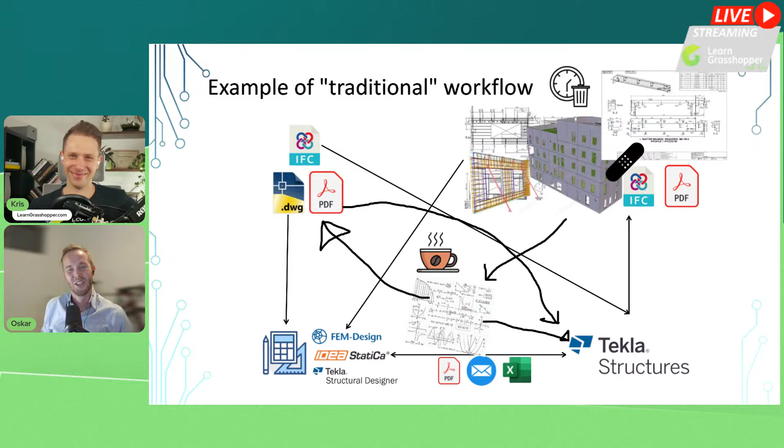This workflow might work if you don't get any revisions, but as soon as you get a revision, it all falls to pieces. You don't know which file to use - is it the one called old, new, latest 5, or is it the other one? So that's the problem with all of this.

So in an ideal world, we have a digital workflow where files are being interpreted by programs instead and fed through. So if the architect updates their DWG file, we can just press a button, rerun our analysis, feed that back in, and see if it changes anything in our structural model and so on.

So there's a big difference between writing on a piece of napkin and having everything flow seamlessly in a perfect world. I understand it's hard to automate everything, but automate as much as we can, I guess. I'm just trying to paint a picture of what's happening in the real world and what we're trying to achieve.

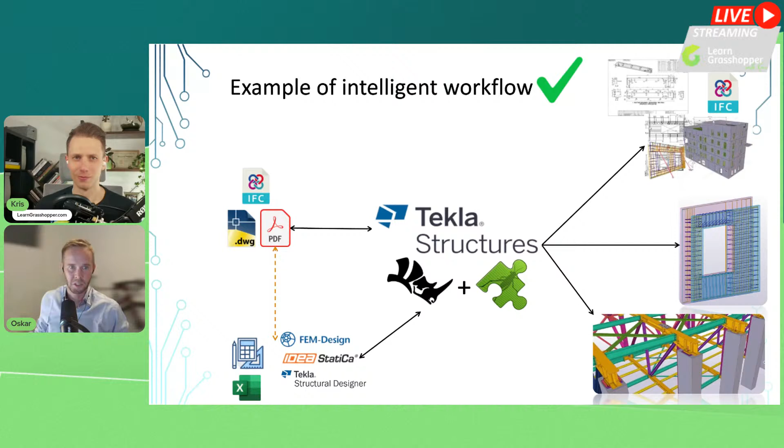Yeah, it totally makes sense to put software in charge of handling all this data instead of humans, especially with all the revisions and all the data entry - repetition, having to sit there and look up a standard table, or look up results from a calculation in a PDF. It's just made for errors.

So I'm just going to move on to the next one. I have a bit of a live demo, we'll see how that goes - we always know how live demos work in live presentations. But I just wanted to highlight a few things. If you're new to Tekla Grasshopper, Sebastian and Trimble keep pushing out a lot of updates - these are fairly new tools in the last 6 months, maybe a bit longer, but they can be great to visualize things in the model for us. So let's see how we can show some of that in a live demonstration.

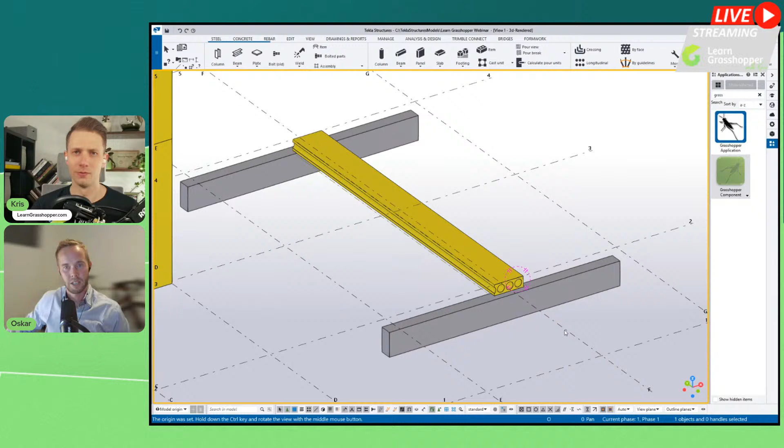I'm just going to load up the hollow core one here, select that, apply, and same as any other component, I'm just going to add that to that component. I get a warning message pop up saying that you have cut this hollow core slab in the wrong zone, you're outside the cutting zones.

So traditionally, you have like 1,000 hollow cores, and you have to check them manually that you have cut everything in the right position. So what can we do to aid that?

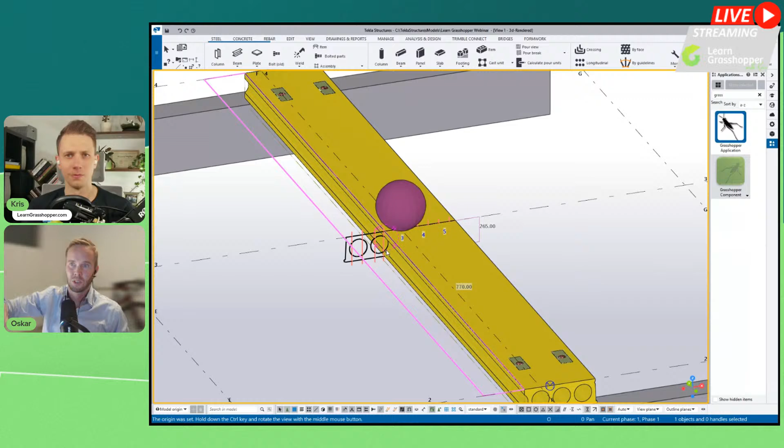So instead of having your standard PDF where you check your cutting zones where you're allowed to cut, we can just take that PDF and embed it into the tool. And if you're outside, it just pops up in your face, so it displays straight away.

So I don't really, as the user, need to know exactly - I can see where these zones are allowed. So I'm just going to take this and move it 50 mil that way, and then I'm just going to hit modify on this one to see what happens.

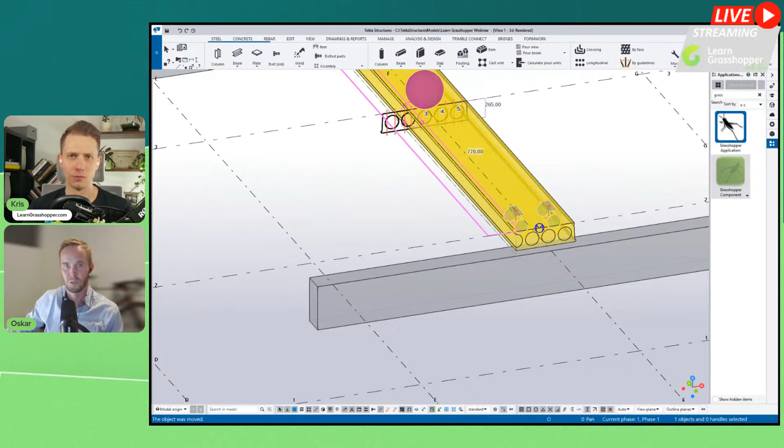So my warning bubble is gone. That was just - I like to place some sort of visual thing on the object in the model to say, okay, something is wrong, you should look at this.

I'm really happy that you started with this example, because like all users, when they're thinking about Grasshopper and Tekla, they are thinking about just pure 3D modeling. But if you are starting with this quality assurance tool, this is like the best thing that what we can do with Grasshopper, and maybe showing that on one hollow core slab doesn't make big sense.

But if you are thinking about thousands, where if you are modeling, it's like huge help to check this out. I could apply this to a whole floor of hollow core slabs, and then just have the tool check all of them, and then I just attend to those - if I see any bubbles, I just go and check them.

I can make Tekla change - I can make Grasshopper change the color of them, for example, as well.

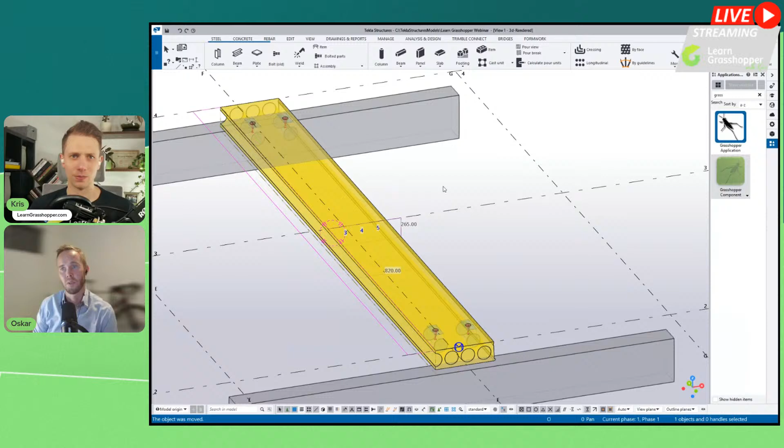What we also notice is that I've added some dimensions, so you can see the dimensions of the slab, and it's printing the intact cores - so core number 3, 4, and 5 are still intact. What we also see is it's adding some lifters.

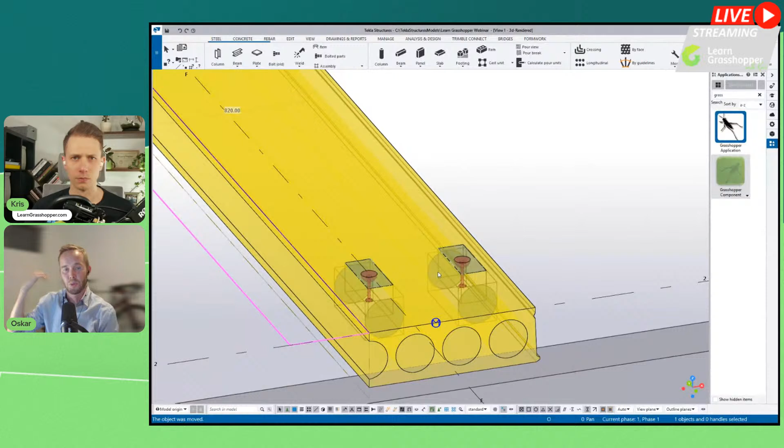And with this, we could run some calculation in the background as well. So we can have it go to just a standard lookup table in Excel, or it could connect to a third-party analysis tool. But for simple things like this, we might already have a load combination, and we know what sort of situation this is in.

So it can then pre-select the correct lifters for us and place them according to our company design. And as a consultant, you might have one precast company that does it one way, and then a different client that is a different precast company that does it a different way, obviously - never the same way.

So this tool could handle both of them - you can have one setup for 2, 3, 4, 5 clients. It's just trying to make it streamlined, not having 10 different tools to maintain. That's the idea behind this as well.

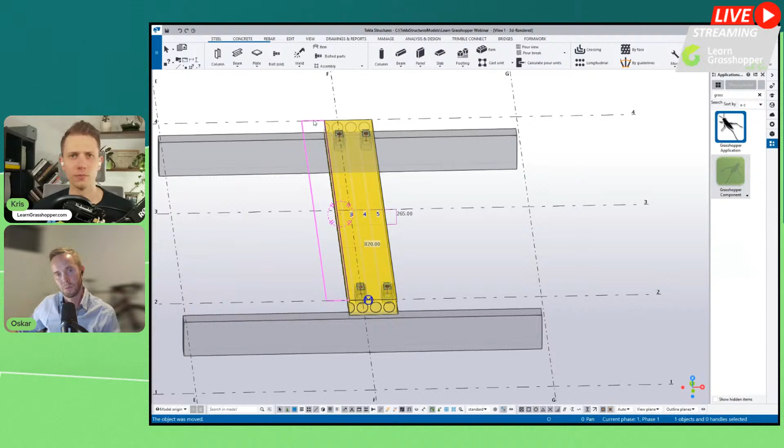And as you can see here, can you see that? Yeah, if I highlight, I've also highlighted the cutaway area. This makes more sense if you have more slabs next to each other - you can see how much we've cut away. Might be useful for some people as well.

Can you also show for people who are first time seeing Grasshopper a component, where is this spaghetti monster? Is it hidden from the user? We can press that little pen here, and it actually pops up - it pops up on my other screen. Let's see if I need to... I didn't share the whole screen, so I'm going to stop.

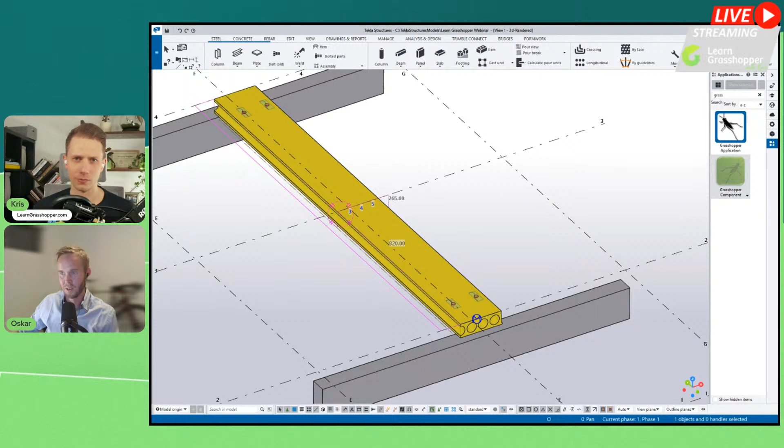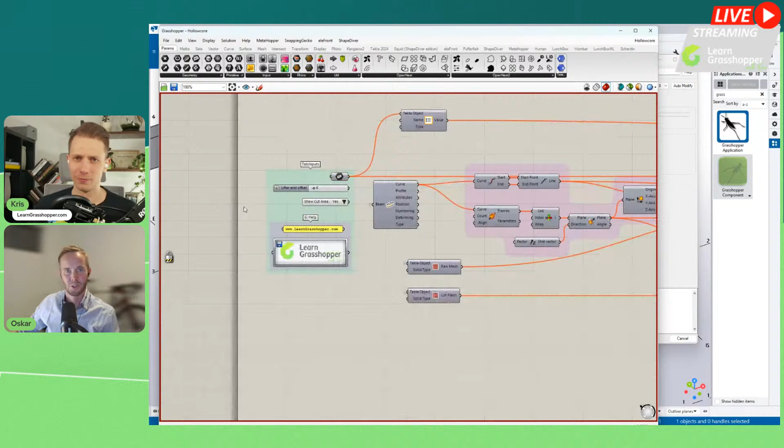Yeah, we can see it. The spaghetti is not too bad, but it's sitting in there. This is a very small script, but just for this exercise, it's easy to demonstrate. So you still have your spaghetti, it's always there, but it's not too bad. Thanks for putting the Learn Grasshopper logo on that. I figured you'd like that. And then the tool also tells you everything is okay, good job, so you get some positive reinforcement there as well.

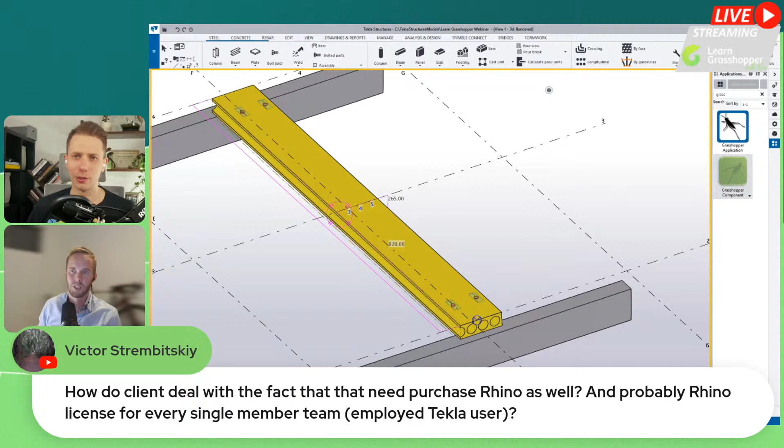So we have one question before going to Victor, because I think this is a really good question. How do clients deal with the fact that they need to purchase Rhino as well, and probably a Rhino license for every single team member employed as a Tekla user? Because we have to explain that if you are using this Tekla Grasshopper component, you need Rhino on your computer. So what is the attitude of your clients? I think that's a thing we need to be upfront and tell people about.

But cost-wise, it's probably a tenth of what Tekla costs, so it's not a big thing to be honest. And there's no yearly maintenance on it either, so there's always that. It's a lifetime license for Rhino, right? Yes, correct, you only pay if you want to upgrade in the future pretty much. But compare that to building an API tool where you access the Tekla API straight away, you also need to maintain that, and see how much that costs. So this definitely has its benefits compared to just making your own API tool straight out of the box.

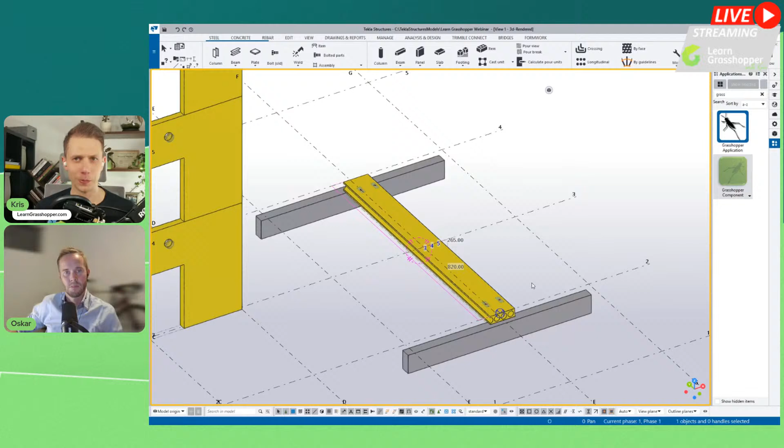So I'm just going to jump back, there are some other things I might come back to this, the hollowcore slab, later. I'm just going to jump onto Greg, who is together with us, and wrote that fantastic use case. Absolutely love it, after 18 minutes I have already got something of value. Thank you, Oskar. Thanks, Greg.

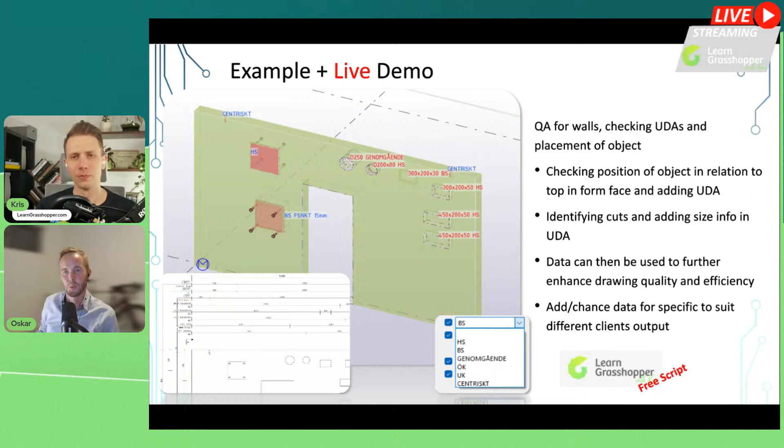All right, so we're going to jump into this, another live demo. But before we jump in, I just want to explain what it is. So it's like a quality assurance thing for a wall in this case, it doesn't need to be a wall, it can be anything. But what it does is it checks and colors the model for us. So again, going back to these components here, coloring and adding text to the model. I like, if you left, right brain does the color and the other one's logic, I don't know which one's which.

We can use this to apply color just for quality assurance. We can apply UDAs for better drawing representation. So if we have a cut in our model - usually you make the cut double the size or bigger than what actually is being cut out, because Tekla, if you know, you know - we're not interested in how big the cut is, we're interested in how big the cutout is. So this tool actually calculates how much volume is being extracted, and it also looks at which side it's on - is it on the near side or far side of the form? We can check that, and that's in relation to the form face, which side you've picked as your top in-form face in the Tekla model.

So we can do that, and we can also check all the cast-in items and see where they're situated, and we get a nice colorization of them in the model. So I'm just going to stop sharing, and jump back to my Tekla model.

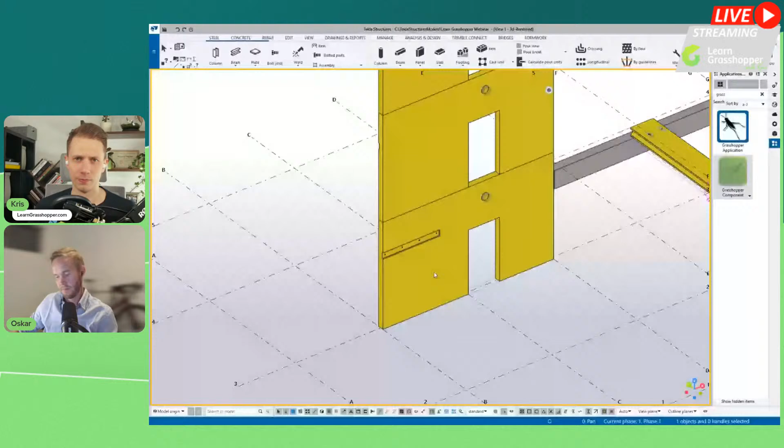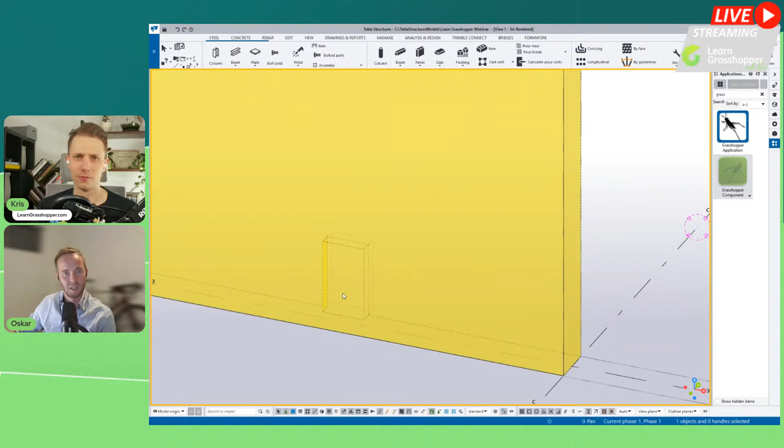So I'll share this, let me know what you can see. Very intense Tekla model here. We have three wall panels on top of each other. If we make it transparent - I'm just going to turn that off - you can see that we have some lifters, some ferrules and some rebates. We have a door, like an opening. And on the one above, I've just flipped some of the things around.

And on this one, if we check it - I've done this, we'll just go one step at a time I guess. So I'm just going to load this one, go and load a different script. You can basically just browse to it here, but I'll just set a preload, and it can be placed.

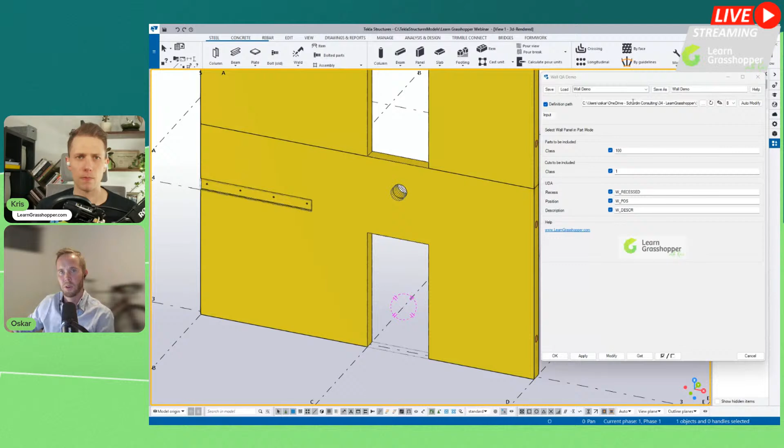Is it placed locally on your computer, or are you also using some tricks to make it work on OneDrive or Google Drive or any other servers? This one's on my OneDrive, but usually I don't have too much experience running it in the cloud, other than OneDrive, which is sort of locally anyway. But there's not been that much need for that, I've found. So maybe you have some other experience on that.

No, just giving tips for everyone. You can share it on the cloud, so people from the company can use the same script, saved on the company environmental settings.

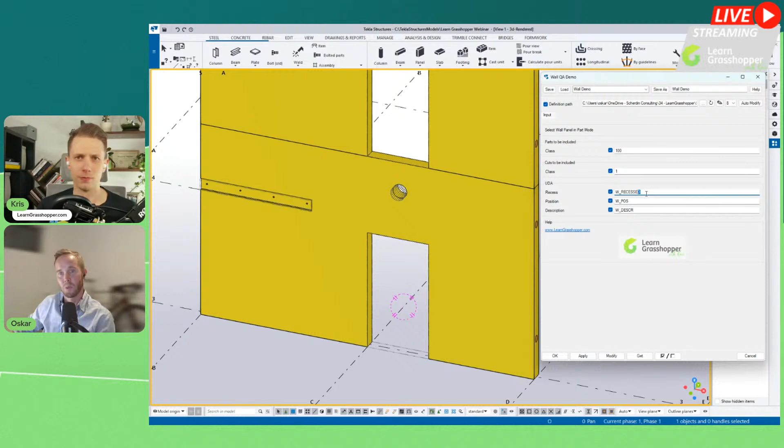So I have some inputs here, like which class of the cut is going to be included. I can include certain classes of the cuts, just general stuff. Same with the cast-in items, and then which UDAs I want to write these things to. And obviously I have your logo here as well.

So if we apply that and press it, you can see what it did for me now - it just colorized the model, and made my panel see-through.

This is all just temporary text and colorization, it didn't change the class or anything. If I redraw, that disappears. But we can have a closer look - everything that's blue is modeled in the center, so I can confirm I've modeled that correctly.

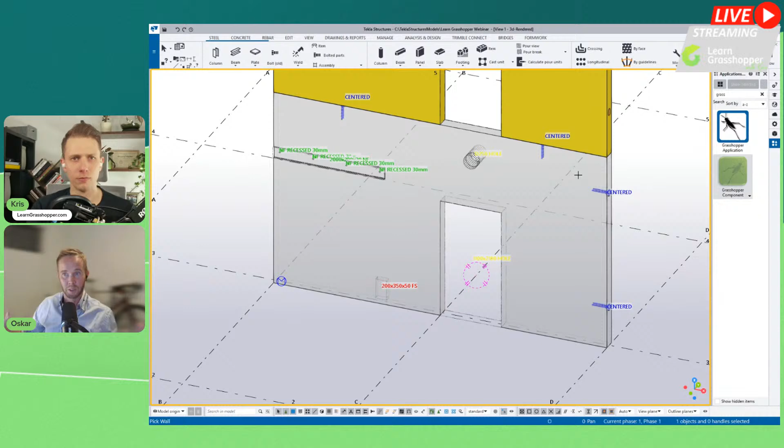I don't even need to zoom in. I can be out here and see straight away that I've modeled them in the center. I can see that these ones are recessed 30 millimeters from the surface, and they're also on the near side because they're green or near face. You can see that this rebate is 2000 by 200 by 30.

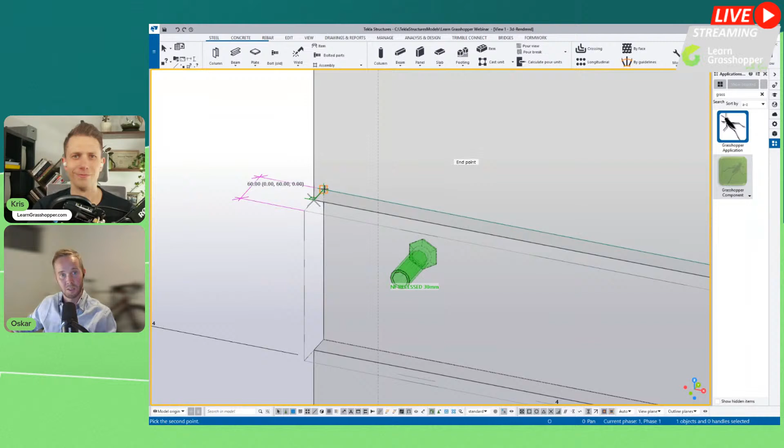So this is what I mentioned before - it's really 60 deep, but the recess is 30. That's what's going to be written onto the object in the model. And if we check, this is what you meant, like why Tekla is making bigger cuts.

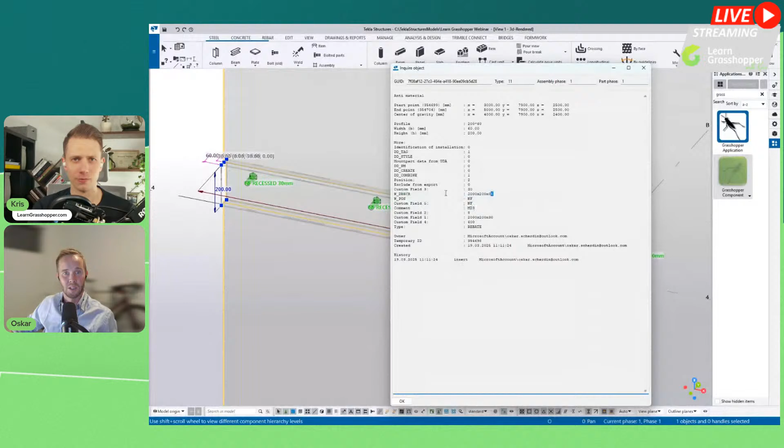Yeah, exactly. So we just make them a bit bigger because we don't want solid errors. We can see that these ones are being populated in here, near side and all this stuff. So all my UDAs are being populated onto the object, the cut in this instance.

We can see it identified as a hole, and it has a diameter. So it handles a round one different to this one - this one just gets the diameter, this one gets the whole dimensions of it. Same here - red text means it's far side or down in the form.

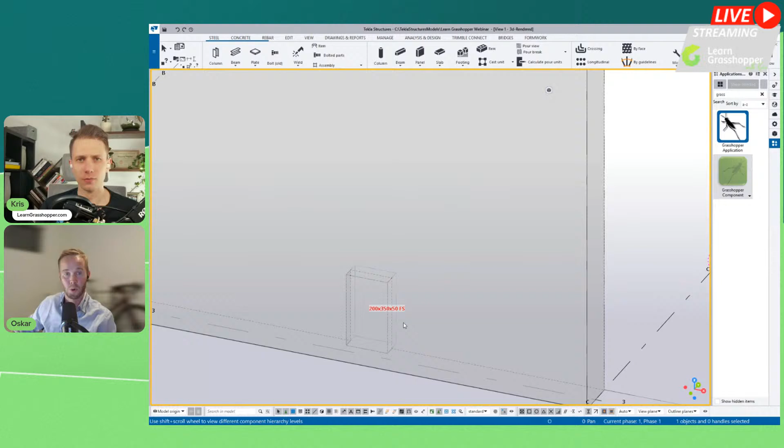So we can do all these fancy things to compare two walls to each other, and it's pretty obvious here what's different between these two - like, oh, this is on the other side. Should it? Maybe it should. But it just utilizes colors and text in the model to visualize very clearly what's going on.

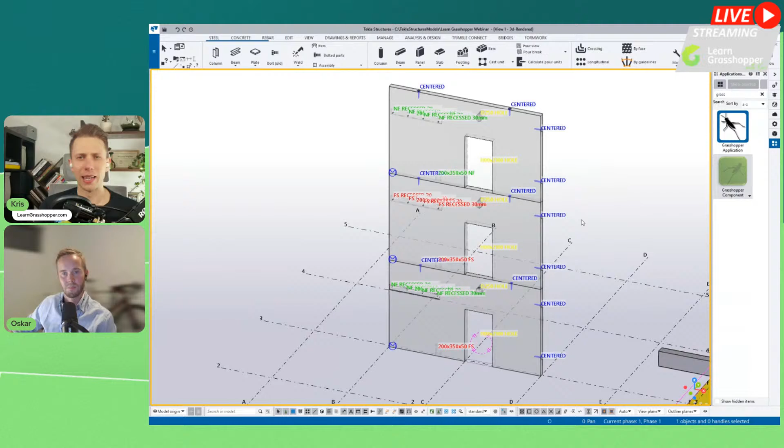Yeah, I really like it because we are engineers - we're really used to patterns and colors, and sometimes it's easier to just spot it, like you can see it. Okay, everything in center. I can go forward.

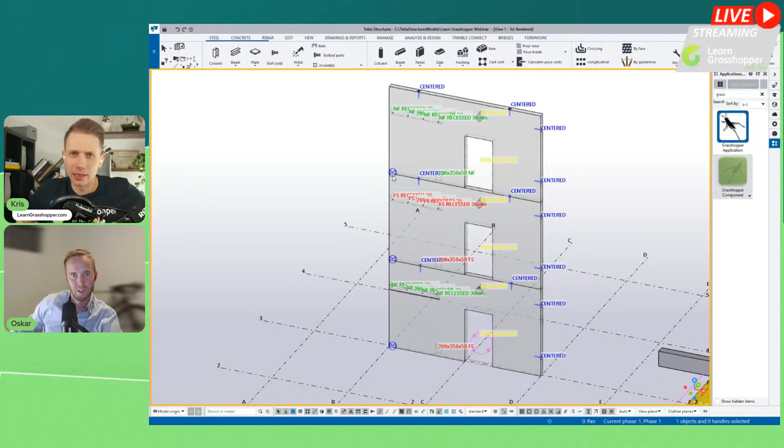One question, more technically into the Grasshopper script - how do you change the wall into transparent? Because it's not just a change of color, it's more than that. If we check on the script, it's just this little guy here.

Okay, so if you change the swatch as a transparent, okay - yeah, it's just that one. Display color under Tekla, this one here. But you have to change it in the swatch, you have to change it into transparency. Yes, down here.

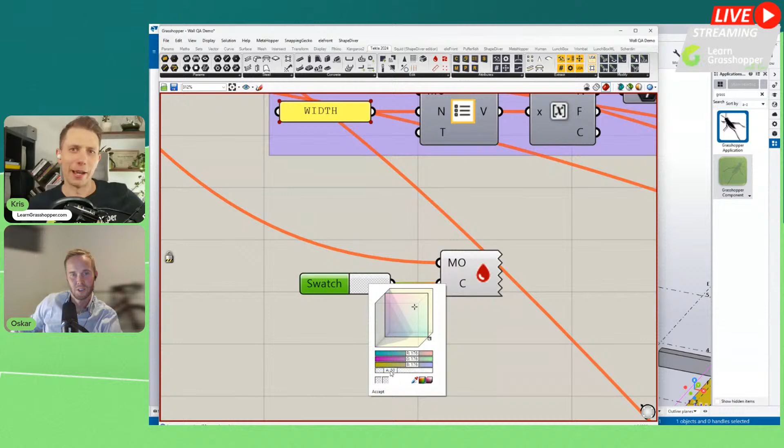Yeah, that's a good one, I always just made it 100%. So it's cool that it's working also with color Tekla. Yeah, I never tried transparency, but it's also giving here the idea of what is inside already, so good to know that it's working properly.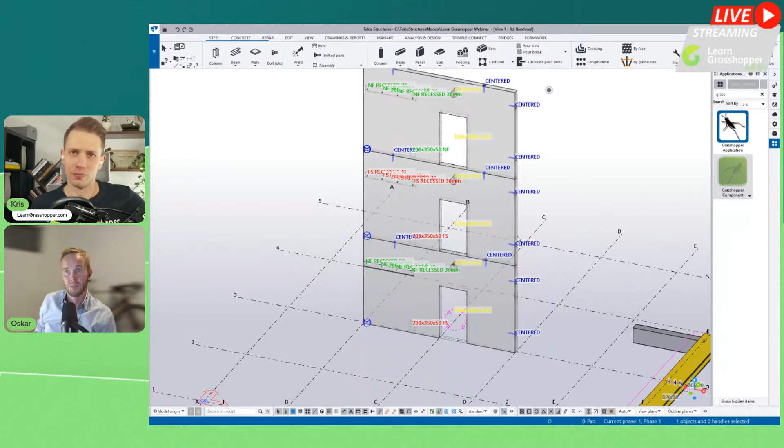And this is just a simple example. We could be checking all sorts of things, like if a wall opening is too close to the side - do we have enough thickness to support it? We can check everything pretty much, like look around it - is there a steel beam coming in here? Maybe yes, no. We can be pretty smart with all of this.

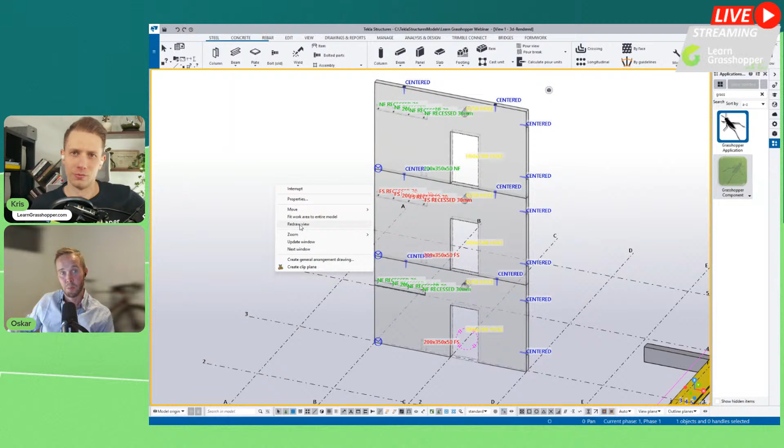But if I now redraw, these are all temporary objects, redraw, and it goes back to your normal one. The object, like the component, is still there, the UDA is still there. So if you change something, you could just rerun that component and it'll update your UDAs, your drawing will look better, and so on. And it's not that heavy - all this display, colors and dimensions are really light.

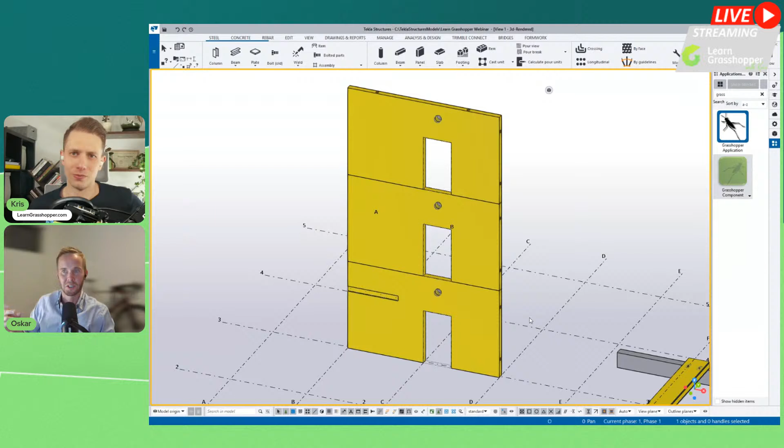So even if you would like to make it for the whole building, it will not crash your Tekla, because this really takes a small amount of memory. It doesn't even create anything in Tekla, it just changes the state in the display at that moment.

It's the same as using representation filters, I guess. Mario asked if you rotate the view, do the colors change? I don't think so, but we can test it. Mario, I'm just going to turn on components so I can see.

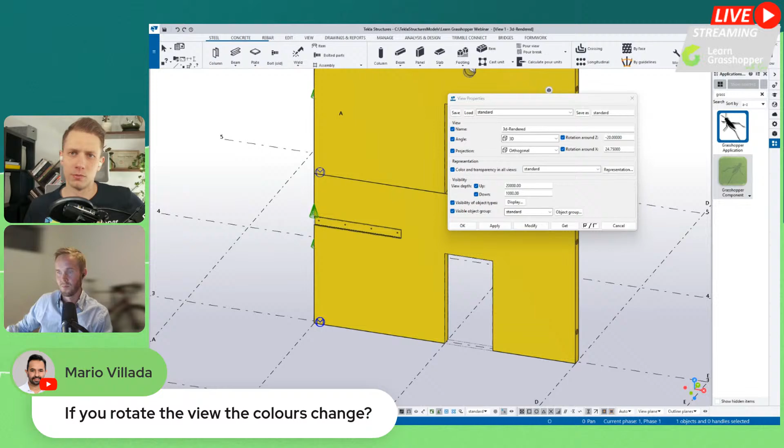They're 3D, and the color remains the same, and they are also rotating. This is also one of the cool features, that they rotate when you are rotating, so you can always see and read it through. Yeah, exactly, so it's all built into the Tekla core, I guess.

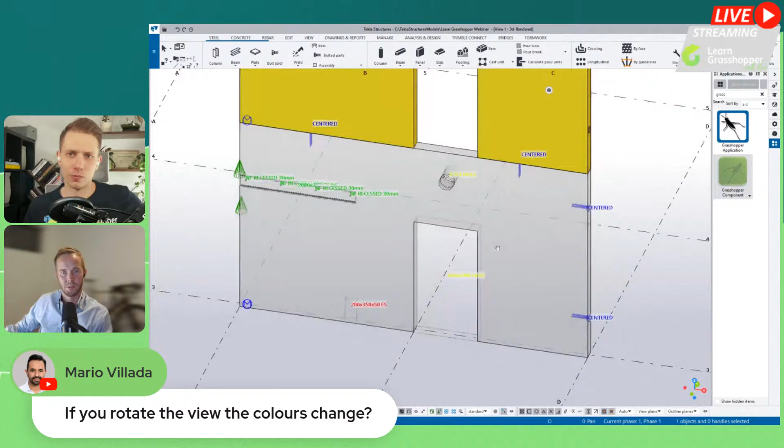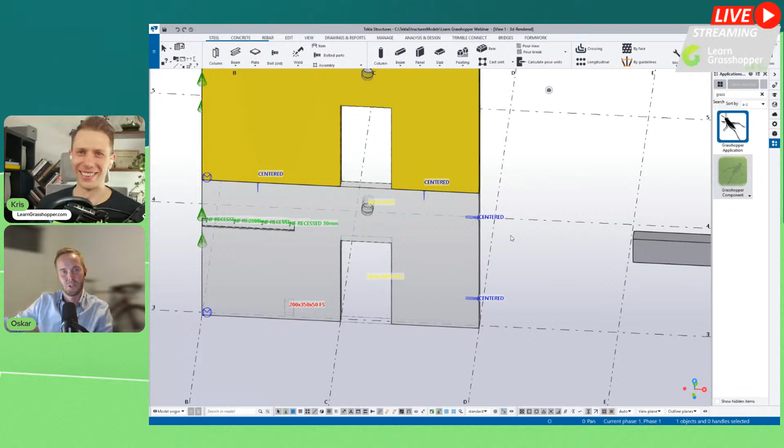You could dimension everything up as well if you wanted to add dimensions, same as we did with the hollow core. When I reran this, I added the thickness and the width of that. I could dimension things like distance to objects, or just the openings themselves. So if something looks weird between the two, there's a millimeter difference there. Instead of finding that out in the drawings when you've done the numbering, you might as well find it out straight away.

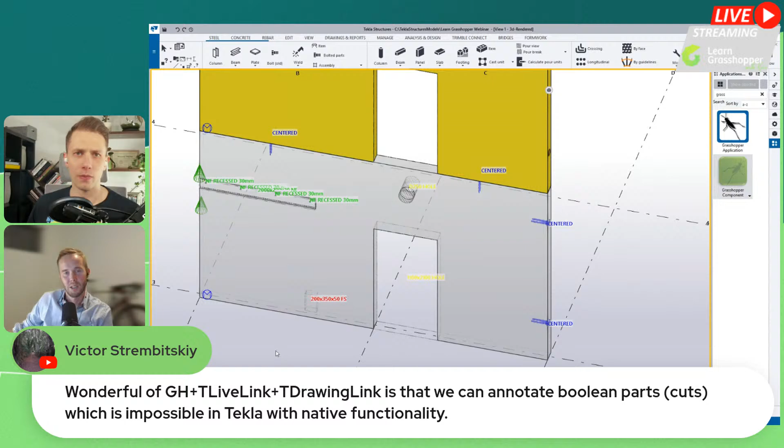So a lot of visual QA there. Victor also commented on the wonder of Grasshopper Live Link and Drawing Links, that we can annotate Boolean parts, all the cuts, which is impossible in Tekla with native functionality. Yes, but you can annotate cuts in Tekla still, so it's no different doing it manually, I guess. I could just add properties to this one, or add UDAs, but we have easier accessibility this way for sure. That's correct, Victor.

All right, any more questions, or should I jump to the next? Yeah, just one comment — Willie just said that's a nice bike behind you.

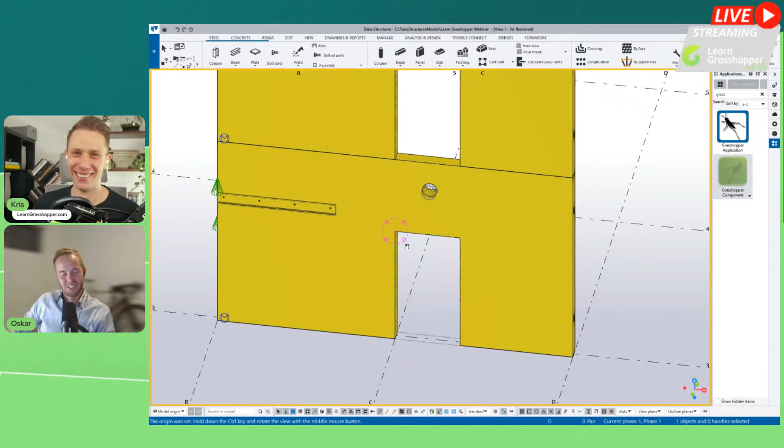It looks blurry and fast. Blurry and fast, we keep our fingers crossed for Oskar. He's doing his first triathlon this year, so good luck on that. Thank you, the goal is to stay alive.

That's good. We have some more questions, but maybe they're more about other things, not related, so we will jump to other questions in the Q&A session. I will try to answer the questions that are related to the topics you are covering.

Okay, so we can see your presentation. So I will pass this script on as a gift to your viewers as well, Kris. Even though it probably doesn't work in every situation, it will give you a good idea of what you can do and how you can do it. And there are always better ways to optimize the script, so don't be too harsh on me.

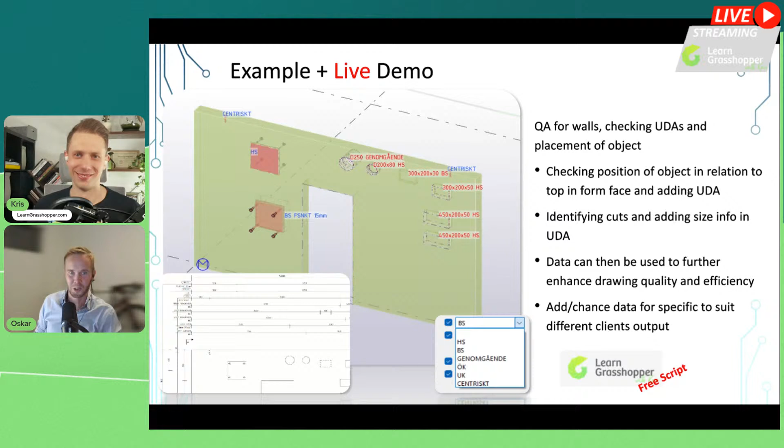It probably works with beams and columns as well — two-point insert objects, I guess. But it's best that you get an idea of how it's made, and you can make your own changes based on the example. I make no claims that it's going to work in every situation for every project. It's more like an idea of what you could build, and this could be built to work in a lot of situations as well.

It was a nightmare, like it was in the DWG. Oh crazy, it was 10 years ago. I just see it right now, and all my nightmares came true. Yeah, I've done the same thing many years ago as well.

So usually, or traditionally, the electrical engineer or whoever's doing the electrical stuff is providing you with schematics in 2D DWG. So first you get a long row of all the electrical connections, I guess, and they look like this. They just have some dimensions, and they're positioned according to the floor level on each level, and they each have a number. Then you get a plan for each level, which also has a bubble with a number which correlates to this.

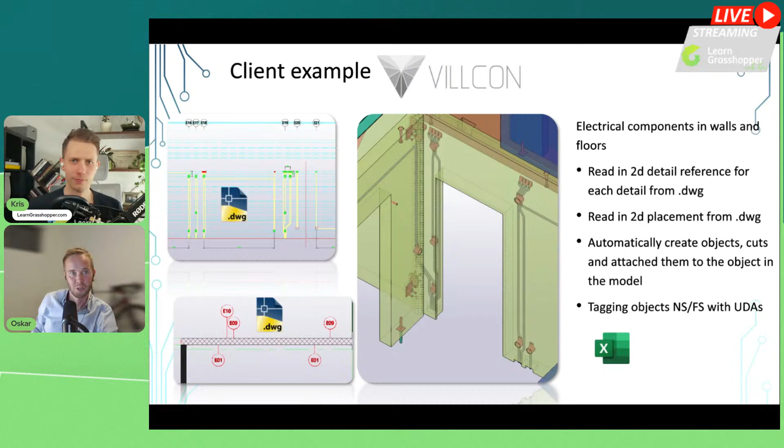Pretty much - I have a Rhino Inside interface there as well, so they just have to have it installed on their computer. Make sure everything's up to date, but otherwise it's just as simple as we showed before.

And then I have another client example, which is an old employer of mine as well. They have a division which does all the precast stairs in Sweden, Strängbetong, and they've gone pretty much all out on automating everything in Grasshopper for their Tekla models.

So the input data comes from the engineer or from the user - we specify, it's all in Swedish, I will translate a bit - but things like load combination, exposure class, fire rating.

You can point to a specific file if there are special conditions - we can do that as well. But essentially we take all of this information and stuff it into the 3D model, and save all the data into that 3D model as well. So not only do you save a lot of time from modeling it, but you also get all the data stored on that object in the model.

I'll show some examples. And this is a pretty neat thing - I'm not sure if you used it this way before, Kris, but you know, when you apply a normal component in Tekla...

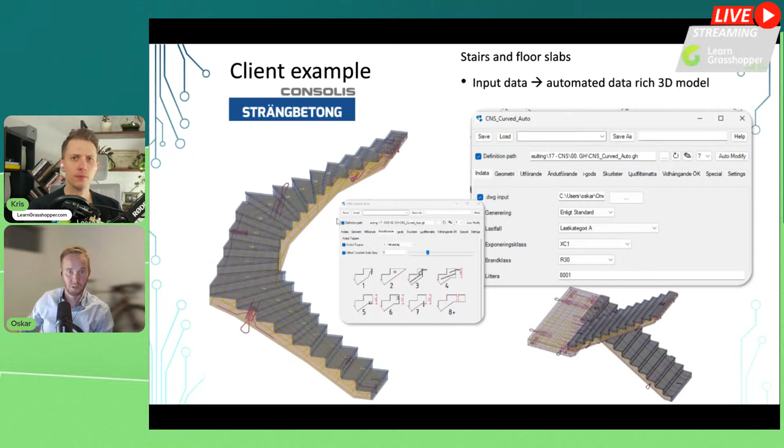...like a slab, and it looks around in the model using the pipeline, and we can then determine, okay, we know that that's a stair coming from below. It has 11 steps, it weighs this much, so we know how much, and we know what end condition that stair has as well, because we have different sort of ending types.

So it can adapt to that without having us fill all that information in. Same with, if we go back to our hollow core slab, we could attach the lifters and check for all those conditions. We can also check how much this hollow core is sitting on each side of that beam in that model - is that sufficient for this size hollow core? You can check all of these things in the background, so it's aware of its surroundings without having to click on the model and specify, you can automatically find all the objects. I use it all the time for exercises and projects.

There's one thing that maybe should be changed in this object pipeline - the filter. The one thing I'm not liking that much is that you have to define all these filters through Tekla. It would be cool to just type it, maybe make this filter inside Grasshopper, because for now you have to define exactly type of beam, with the class, with the shape, and so on - it's an object visibility, object selecting filter. But if you open up one of those files in Tekla, you can find out that it's just a text file, and you can script that thing as well if you wanted to.

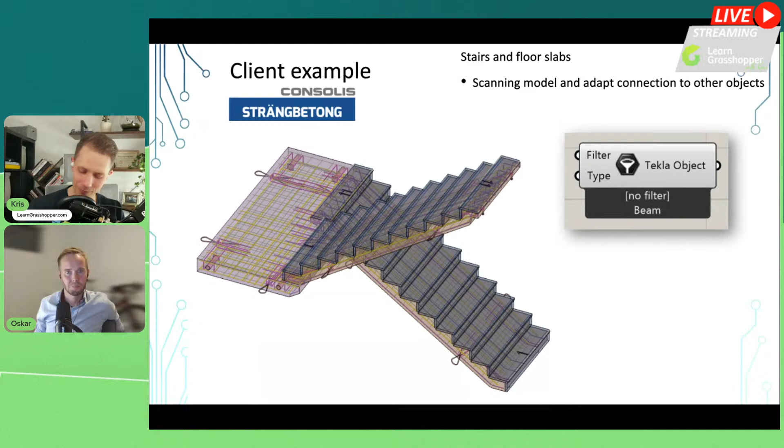If Sebastian is listening, we could do with making filters straight from the canvas in a Tekla component, please. Yeah, I'll put it on my list as well. Good. So components can be aware of their surroundings - that's what I wanted to communicate there, without having to click everything.

With these stairs as well, we actually run an analysis in the background - what we've done is run the analysis so we don't have to open up a different analysis software every time we run the Tekla plugin. We've run hundreds of thousands of calculations for all different types of stairs, so what we do is just a big lookup table. We go, okay, this is the situation, give me all the results from that. We can then pick the correct size of lifters, support points, reinforcement, thickness, right grade of concrete - all the stuff we have to know.

We can also store all of that data as UDAs in the model, so the analysis results are stored on the object. We can choose to send that to the IFC file as well. So if a client wants to know what's the load on the support here, we already have that on the object, so we don't have to make a separate document for every element or elevate everything in the model and do separate documents - it's all in the model, you can just go have a look. So it saves a lot of time, and also helps with QA, and it's stored there forever. If you want to look at the building's lifespan, all of that data is stored instead of in an archive with spider webs on drawings.

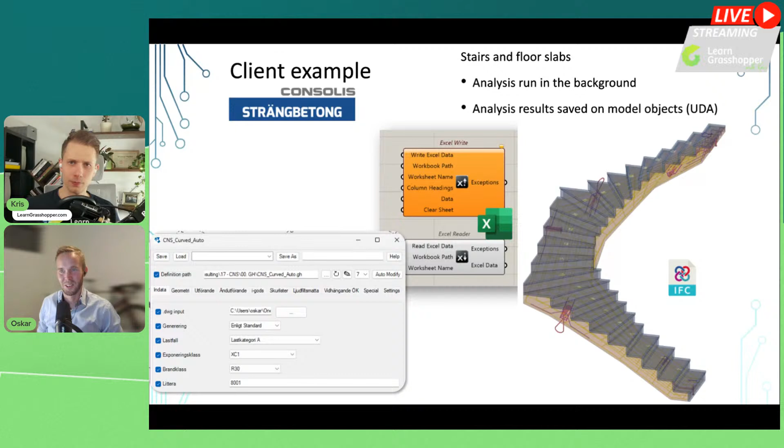It's very hard to get very good drawings. But what we can do is with the script, we can place dimension points at certain points in the model, and then we can utilize that on the drawings, so we can get perfect

But yeah, I just wanted to highlight the idea that it could do stuff in the background, we can prep the model for a better drawing. So if we look at the whole thing, yeah, we can model everything. That's good. We can have UDAs for everything. That's also good. And then we can model extra things to make the drawings look even better, or to automate them further.

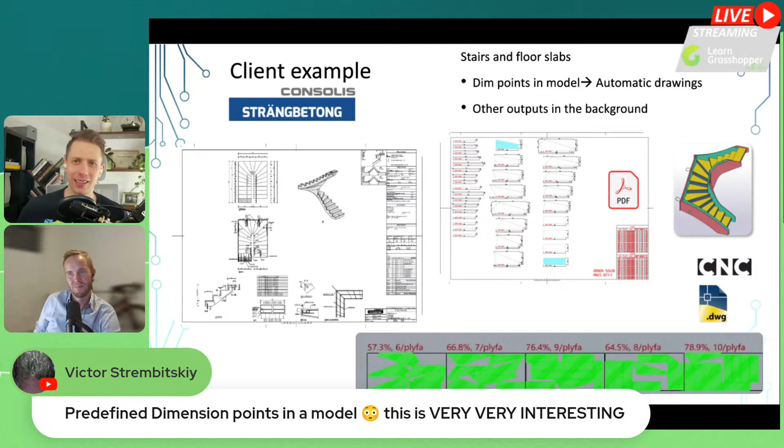Victor said that the predefined dimension points in the model are very, very interesting, so you are giving really good tips. Like I see people aware of Grasshopper and Link, and you are just giving a good idea. So thanks for that, even for me, that's a really good example. Thanks, Oskar, good that I'm throwing some nuggets out there, hopefully.

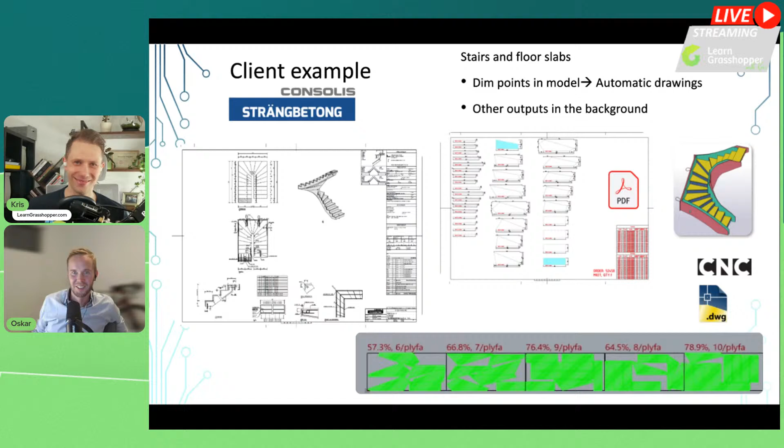Just to reiterate, everything that's being done, all the data is still stored in the model. If I right click on one of these objects and check the UDA page, it's a lot. But we can use all these UDAs when I connect the stairs, I can read from the next part to see what I need to do, or how I connect with that part, because I get all the loads, what it is, connection types, how many bolts and what have you. So that can be used in many instances, for reports as well.

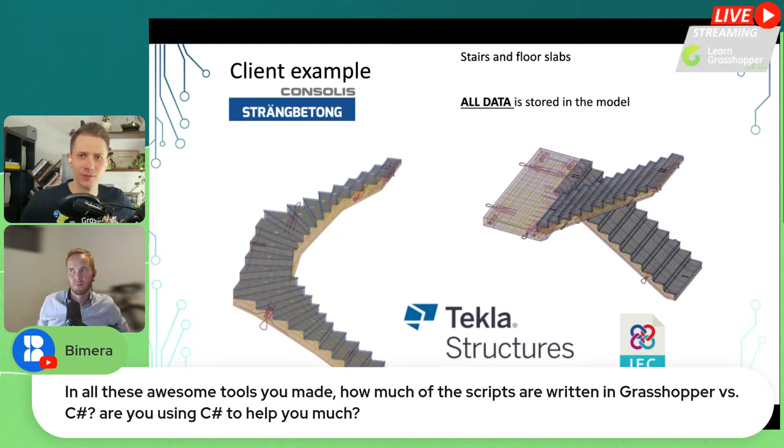About colors, can colors from the model be applied to the drawing? I'm not sure, maybe we have Greg here. Have you tried, Oskar? I haven't tried, but I assume so. You can do the same, like change the visibility and color of the model, but it's not based on a class, it's not a temporary thing. You have to change the object color in the drawing, so I guess it's not a temporary solution. It's not great, but it can be done.

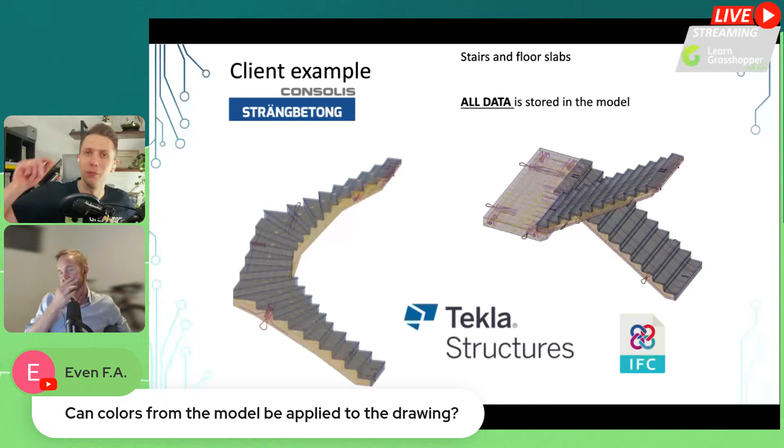With Tekla 2025, I saw that you can have any color on the drawing objects, a full RGB spectrum. You can change the color of the object and then maybe create a separate script that resets every single color in Tekla. You can run the same checks, but maybe draw some temporary lines on top of it or something.

What are we seeing right now? This is a very common question I get from companies that have already invested time into custom components. They ask, are custom components better or is Grasshopper better? Is it one versus the other? I'd say it's neither, because in my opinion they go hand in hand.

Grasshopper can use custom components. There's no need to script stuff if you don't need to. If you can use custom components, use them, because then you're making a smaller, more powerful script. If you can do the custom component computing within Tekla, it's usually faster than doing it in a script.

Do you have the same experience, Kris? Yeah, the same applies for Tekla native objects. If you can model Tekla native objects, go for it. But sometimes you can spend maybe 2 days modeling some crazy geometry, so maybe it's easier to make an item.

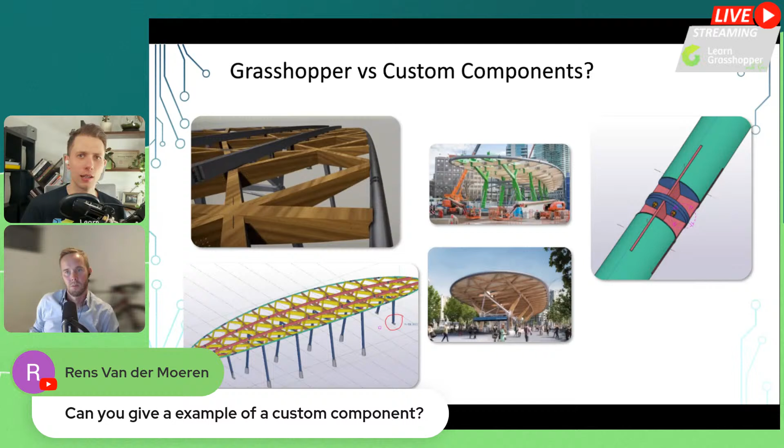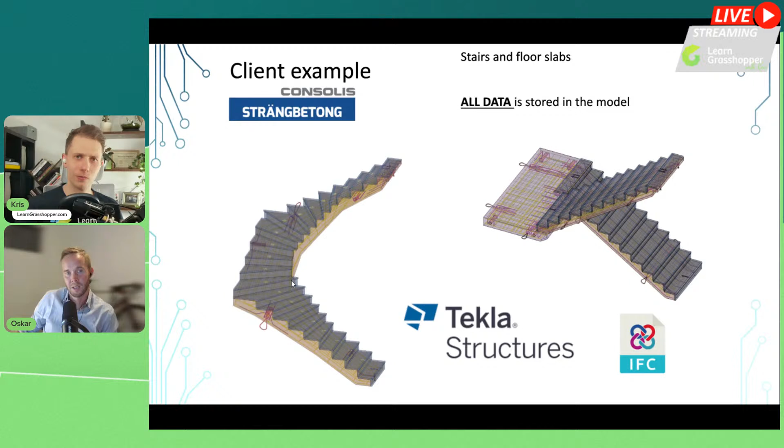If I go back, this lifter could be a custom component, and I place it in Rhino just by inserting 2 points. In the custom component, I can also set all the parameters, like which item should be created inside it, rotation, and size of reinforcement. But in Rhino, I just have a line and a direction maybe, plus some parameters I insert. Does that answer the question?

I think custom components are all the components already prepared from Tekla. On the right side, you can click application and components, so they're pre-made, but you can also make your own custom components. You can use all the built-in components from Tekla as well.

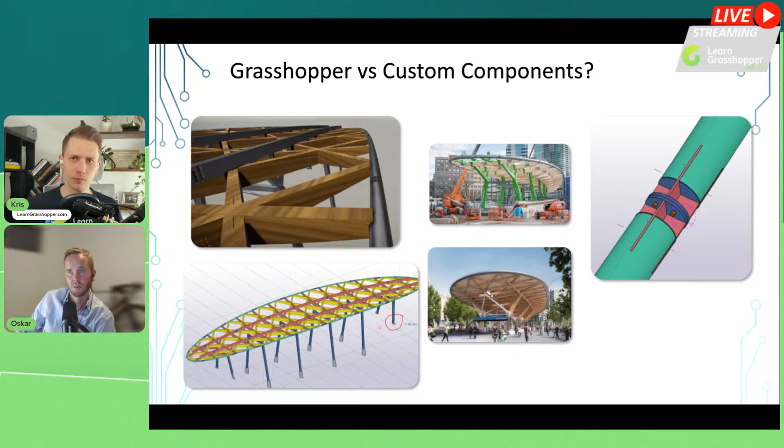I'm so happy you showed this example as one last one, because normally Tekla users aren't working on this crazy project - it's an obvious application of Grasshopper. I'm happy you also showed at the start that you can use Grasshopper for simple walls, simple hollow core - that's an obvious application too, and it's really cool to see. What was your work on that one? What were you responsible for?

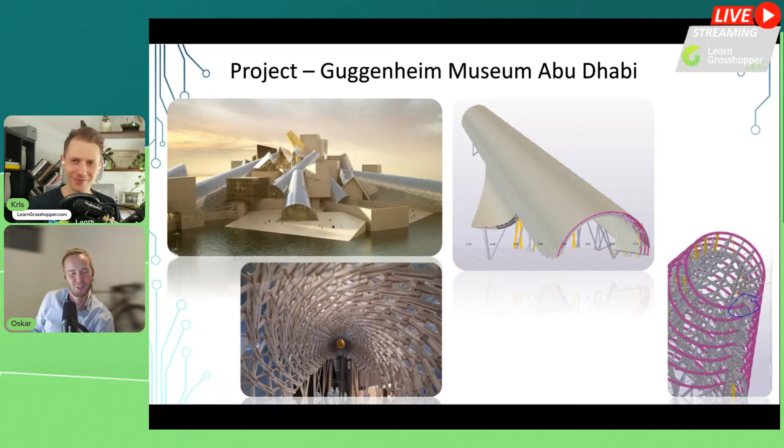Usually I can't say too much because of NDAs, but I can share some generic photos. This was with Arup in Australia, a large engineering company. In Australia it's not as much prefabrication as Northern Europe. We had post-tension slabs, but there's a lot of manual detailing going into getting an accurate 3D model. They were using Adapt as the analysis software, and we took the results and did some spaghetti wrangling.

Is there any live link between Adapt and Rhino? I haven't heard of Adapt before. Yes, there's a proprietary one created just for this, but I don't think it's Arup's. We were able to create a 3D model from 2D design and analysis like this.

You've been involved in bridges before, so you know how these post-tensioning cables and the drape work - they're all different because of different lengths and so on. So yeah, this is lots of work - impossible to model manually, I'd say.

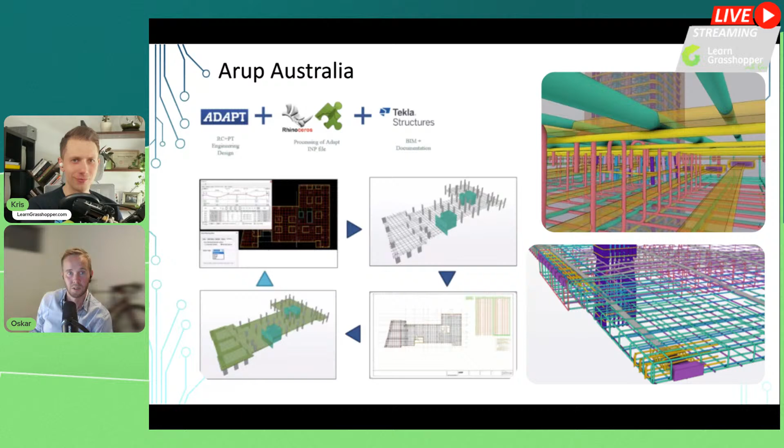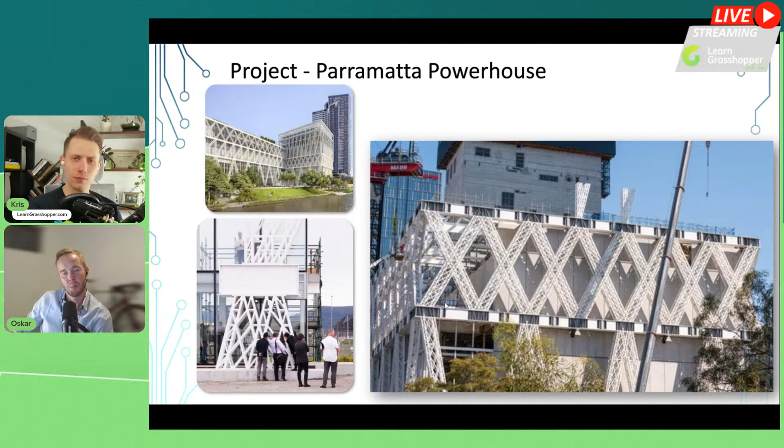So that was another project, this one in Australia. There was a steel fabricator I helped with these exoskeleton buildings being built. You can see the size of these things, but let me tell you about the workflow. We had an architect set the center lines of all the beams from the engineering company, a separate company in this case. I worked for the fabricator, who supplied sketches of how the cross section should look - all welded plates, probably a meter and a half in distance. Different colors represent different thicknesses for all the plates in the cross section, all outlined in a massive Excel sheet.

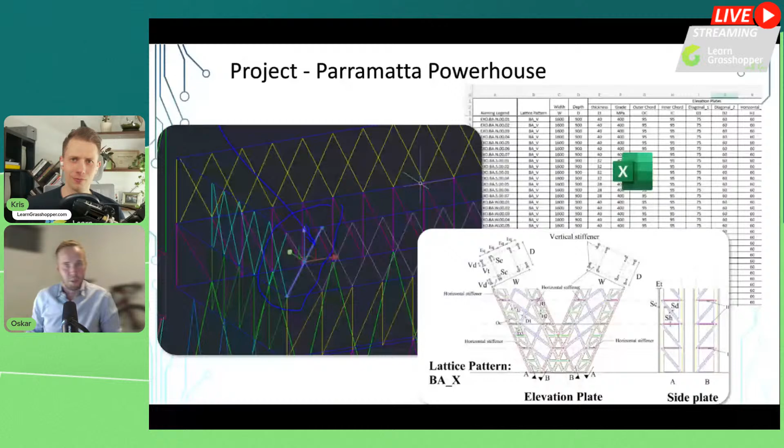Again, not possible without Grasshopper to be anywhere close to doing this - or maybe at one time, but as updates come through you just wouldn't be able to keep up. We provided a fully detailed Tekla model, with all the cutouts, dimensions and plate thicknesses changing all the time. It was a nightmare trying to keep up with that without Grasshopper.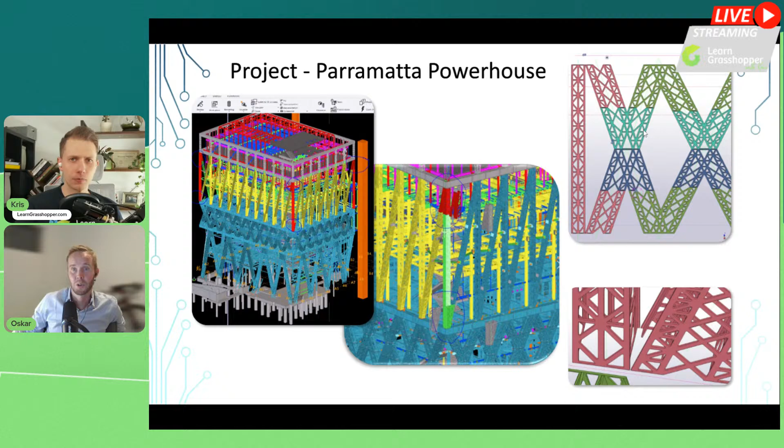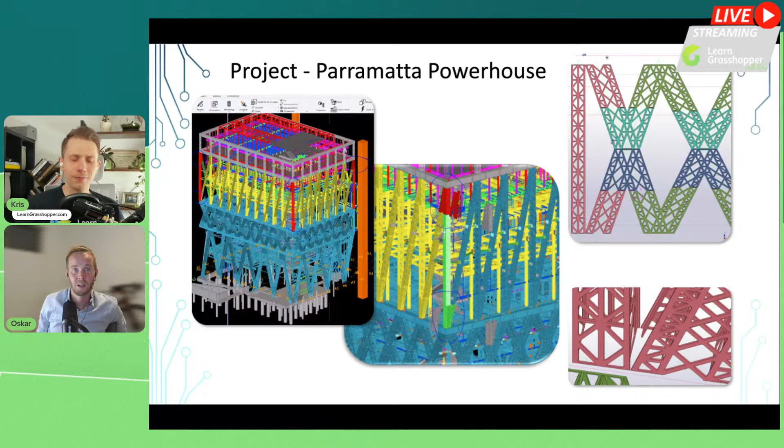Did you also make connections like bolts and welds, or just model the steel elements? My obligation was just the frames, to be honest. All the connections were done later when this was finalized, added with components but not with Grasshopper. But yeah, just a prime example of how things are impossible to do on a normal time schedule without Grasshopper.

If you're not aware where to get all of these, go to Tekla Warehouse and download the Tekla Live Link. You have the same for Structural Designer, and this component you have to download there as well. This is made by Sebastian at Trimble in Finland, so shout out to him because he's doing a fantastic job listening to a lot of feedback from all of us, making changes and updating and adding. Things are progressing quite nicely for us.

Also in the audience is Greg, who's a very skilled developer as well, with a great understanding of the drawing side of things. He's made this Grasshopper application, which you can use to make all sorts of magic on the drawings. Unfortunately, I don't have any examples I'm prepared to share, and probably good for time now anyway. But you can make a lot of things there - you can merge marks, you can move views, you can dimension anything.

I already discussed with Greg that we are going to make a separate workshop about the Grasshopper application. Yeah, it just needs some good examples.

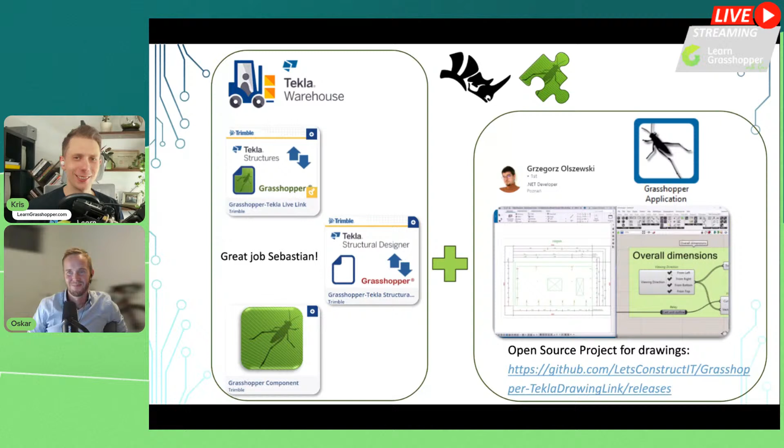They tried with Tekla 2025 to use some AI tools to make this copy cloning and putting all the views on the correct side, but we all know how it works - in most cases you have to do it your own logic. Yeah, I'm not going to comment, I don't want to be in trouble.

But yeah, that was the end of my presentation.

Thanks for this great presentation, Oskar. It was really insightful, lots of cool examples, and I would like to also make a thank you for being active on the Tekla Grasshopper forum. I've been reading all the forums, and Oskar is really active, so thanks for putting there, answering people, also helping Sebastian so he has more time for developing tools. Maybe it's thanks to you he's developing new tools.

If you've seen how many requests I sent to Sebastian, I'm just trying to free up his time so he doesn't have to answer all the silly questions, so he can do development and implement all my requests.

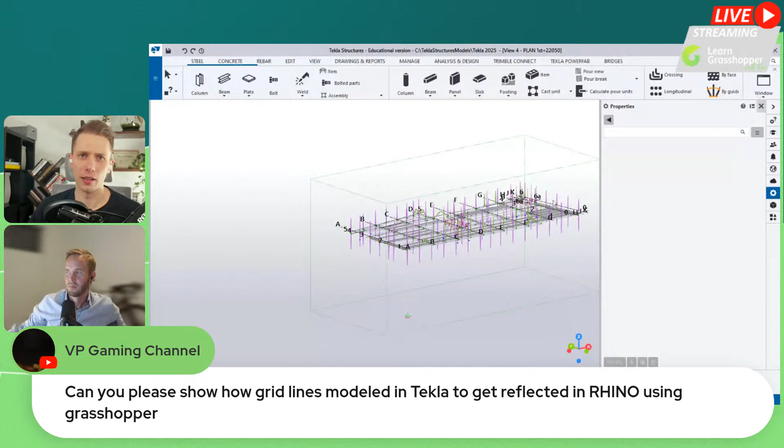Can you please show how grid lines modeled in Tekla get reflected in Rhino using Grasshopper? I'll take this one. I have some scripts from previously. My model is a Tekla 2025 standard model. With the model object, you can take the grid line you'd like to bring into Rhino and Grasshopper.

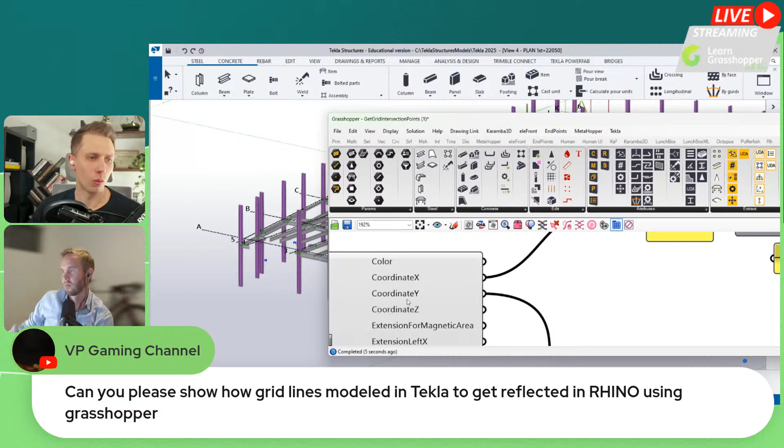With the extend object, you get all the X, Y coordinates, and this way you're separating all the attributes component by component. I'll also show the names of components with the text split, so you can retrieve all the data about the distance between axes and the labels. At the end, you can create all the construction points.

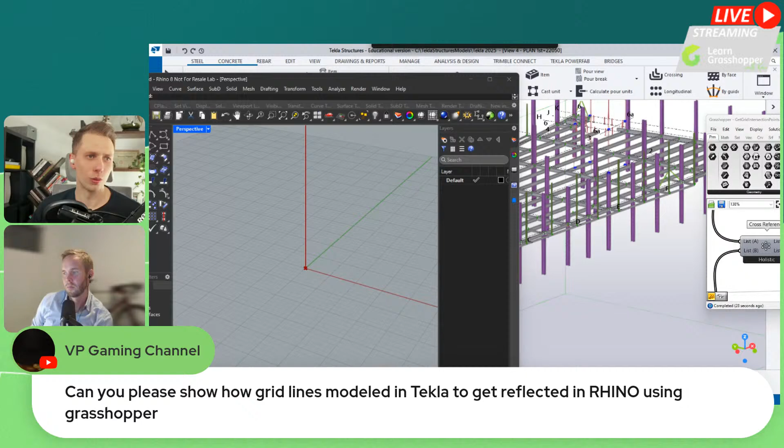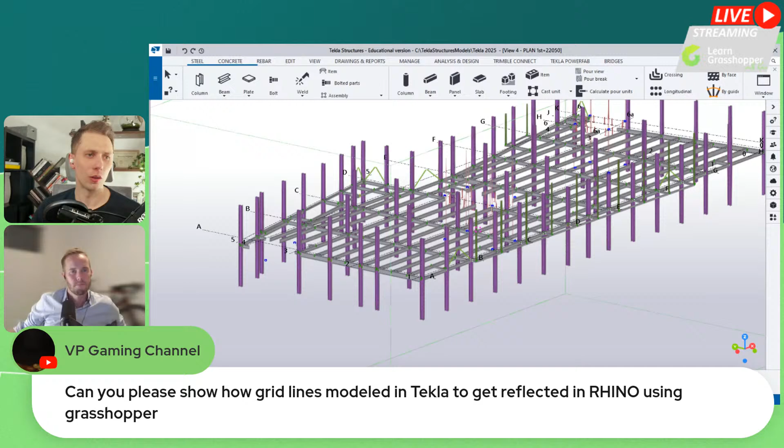Let's go to Rhino and zoom in. Here is the script placing all the columns in the intersection of the grids. As you can imagine, you can create all kinds of fancy stuff, and it also works the other way around. Some of my students made scripts that take the DWG of the axis system and grid lines, then recreate them with Grasshopper components.

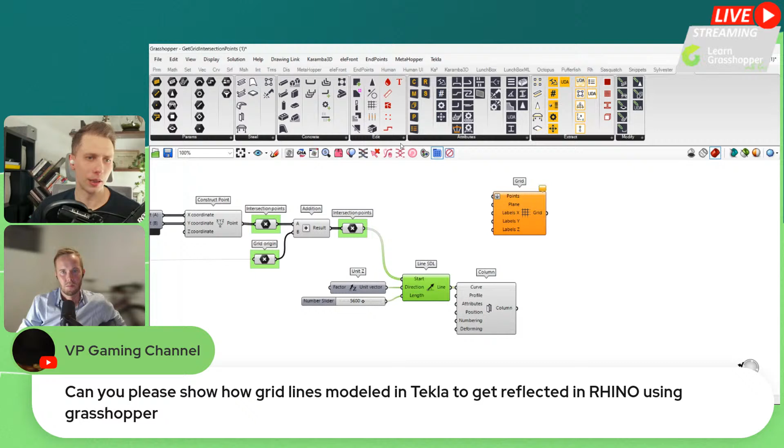So for you, answering the other way: if you go to Tekla, we have components which are grid lines, grid, and there's also a new component, grid plane, where you can fill out label, width, length, and alignment. I hope that answers your question.

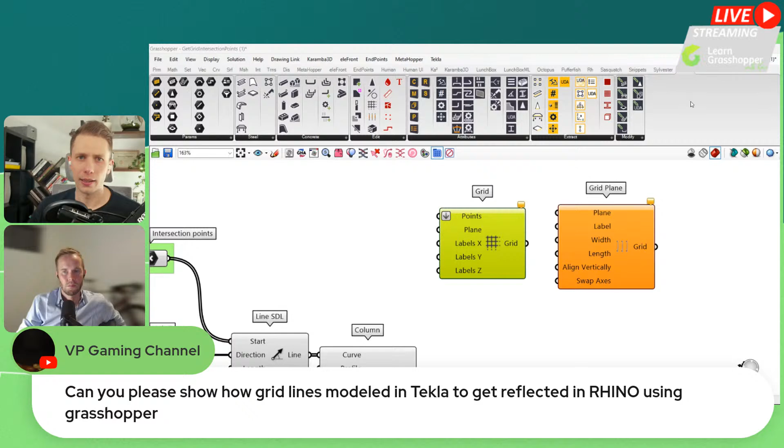Okay, let's move to the next one. Mario asks which component allows us to select a file from within a Grasshopper component in Tekla. Just from a file path - the Grasshopper file path component has an input in the UI that allows us to select that. It can also have smart pathing, so you can use dot-dash-dash and it selects something in the model folder, for example, similar to how it works in Tekla with the 3 dots.

And if you have model sharing, instead of it looking for a script on your C drive, you should probably have it in the Tekla model, so anyone else can then modify that component.

Can we use Grasshopper to add sub-assembly objects like lifting panel, props, etc. to the panel? Yes, we can. We have full control over what level you want to put it on, which one should be the main part, and so on - it's an assembly component.

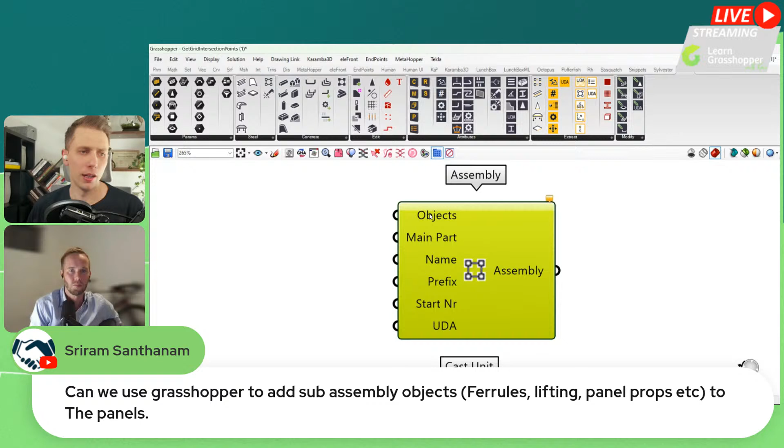There's 2 different ones: you can use the cast unit for a flat assembly, and the steel one for a sub-assembly scenario. With these two, we can place an object and the main part as a sub-assembly, same with the cast unit. Then you can run an assembly into the next one, so you have several assemblies forming one assembly.

Filters in Grasshopper - Greg helped me with this. We're able to create a script that creates a selection filter for each phase based on the phase manager. After creating one template file in Tekla, you can use the Wombat plugin, write to text file, to create the filter unit. So we've answered that question with the workflow.

This is maybe a common one: how to import AutoCAD DWG files in Grasshopper. So you can import that into Rhino, but there are also different Grasshopper components. Which one are you using, Human or LunchBox? Which one? C#, okay. Because then I can get access to things like blocks.

I think in Rhino 8 we've sort of solved this a bit better. There's some new things there where I could access things, but C# solves this a bit better in my experience, when you're looking for blocks and things within blocks, names and insertion points. Otherwise, you can just use a read file as well, just a native one - read file, even if it's a DWG file, it actually reads. Just open that in Rhino.

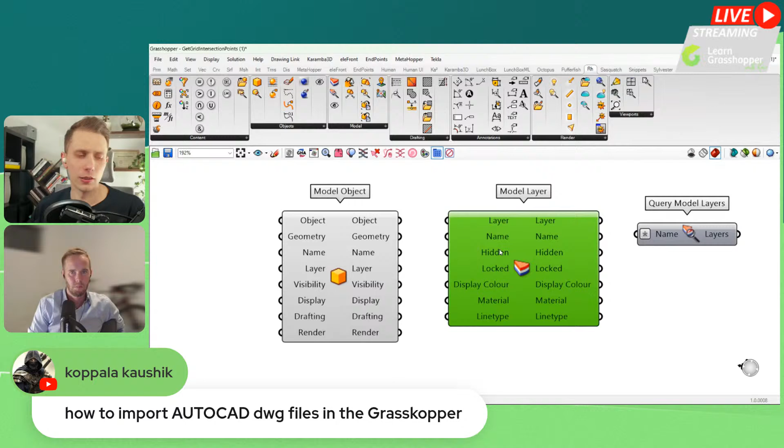Also, as Oskar mentioned, we have Rhino - in Rhino 8 we have a new tab called Rhino, so we can go to model and query the model from the layers. So for example, you can just import it as DWG. You don't even have to import that into Rhino - you can actually specify the path when importing the blocks and objects. Really, really cool features there.

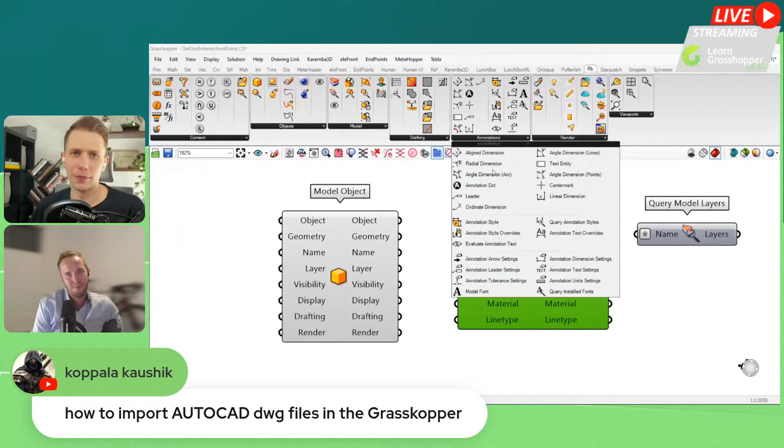The drafting and annotation tab is also pretty useful. Yeah, lots of great stuff - don't have to use Elefront anymore, which is good. Especially for companies that don't like all these third-party control plugins installed on the computers.

Since we're talking about custom components - Tekla custom components versus C# coded components with API - which would you recommend more? I think it depends on the situation, it's very hard to answer generically. It definitely depends on the situation. If you really know the Tekla API, then maybe all the components should be used, because it's not a problem for you. So this isn't supposed to be an issue.

Usually custom components can be something you create on the fly, and it's just a one-off in that project. There's no use creating that in the next project, but it's used 250 times in that one project and works great. So, probably more cost efficient than API.

My experience with placing custom components with Grasshopper is when they're being modeled in Tekla, they are placed upside down. Is it not just changing the input order, or is it maybe something with the coordinate system? I think it's more that you have to set the direction of the cone. When you get the green cone when you place a connection, you can point that to where you want - there's some up direction you can set for that. Sebastian's made it very easy in the last few months.